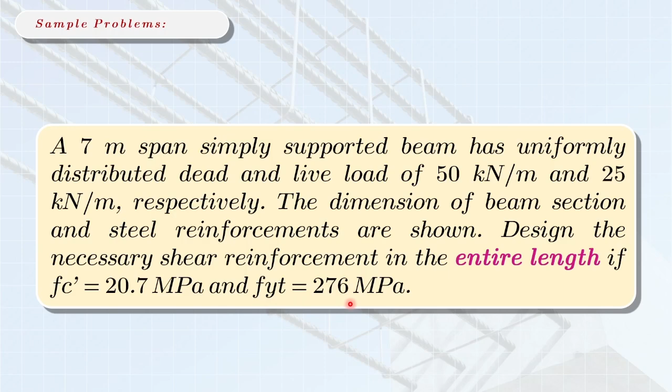Okay, so this is the figure, by the way. So this is our simple supported beam with a span of 7 meters, and our loading here is just simply a uniform distributed load. So we're given here two load cases, the service live load and the service dead load. And please take note, we're given here the f'c, which is 20.7 megapascal.

And if you notice, our subscript here or our variable here is FYT. That simply means the rebar strength of our stirrups, since we are targeting the stirrups in our topic today.

Then please take note of additional information that the diameter of our stirrups is 10 millimeters. So we're given our section. By the way, this is the section at the span of the beam. So we're given the width of the beam, which is 350 millimeter, and we're also given the effective depth, which is 500 millimeter.

And then we have here the reinforcements. So in tension, we have 3 pieces of 20 millimeter diameter. And also for compression, we also have 3 pieces of 20 millimeter diameter.

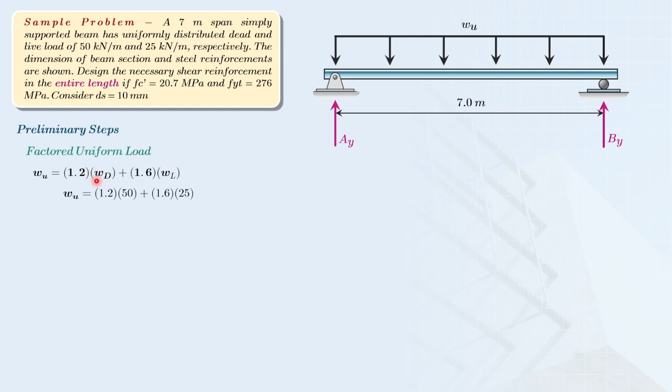Since we're given the service dead load and service live load, which is 50 and 25 kilonewton per meter respectively, to get our ultimate uniform load, of course we'll use the typical 1.2 dead load plus 1.6 live load. So by simply substituting this value, we get our ultimate uniform load, which is now 100 kilonewton per meter.

So that means our uniform load here is 100 kilonewton per meter. And also, since we'll be getting the design shear strength, we need to use ultimate loads here.

So the next thing we'll do, since we're on shear, and as I said earlier, we need to get shear values or construct a shear diagram, we need the reactions at the supports. So what I can do here is simply use our equilibrium equations.

So I will take the summation of moment at point B, so that when I do the moment, I can get the value of the reaction at A, which is just the vertical reactions that we're getting here. The value for the reaction at A is now equal to 350 kilonewton.

So similarly, I'll also get the reaction at support B, which is the roller. So I'll use the summation of forces, or the vertical forces, positive when upward, then this is equal to 0. We simply substitute everything. So the vertical reaction we get at support B is also equal to 350 kilonewtons.

Now let's get the shear values, because we need this as a guide for our shear diagram later on. And please take note, when we get shear values, only vertical forces should be our consideration here. So let's start at our point A.

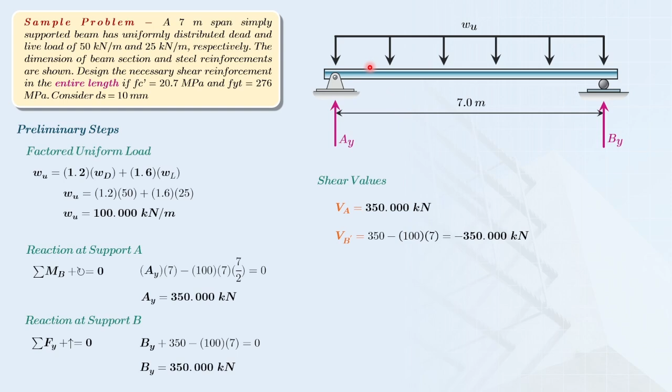Okay, now our next point here is point B. But please take note, when we're at point B or at subsequent points on our beam, we have two values there. First, before applying the vertical load. Second, after applying the vertical load. So that means the shear at point B, before applying the vertical load, means I'll take my 350 kilonewton and minus the total shear in this span.

Which is by simply taking the area between the uniform load and the length of the beam. So that's 350 minus 100 multiplied by 7, which is equal to negative 350 kilonewton. And then after that, we incorporate the vertical reaction at support B, which is positive, so it should be plus, and it should be equal to 0 kilonewton.

So ideally, that should go to 0 in our shear diagram. So this is the respective shear diagram once we plot it. This means we will have a point of zero shear, located at the midspan of our simply supported beam, which is 3.5 meters from support A.

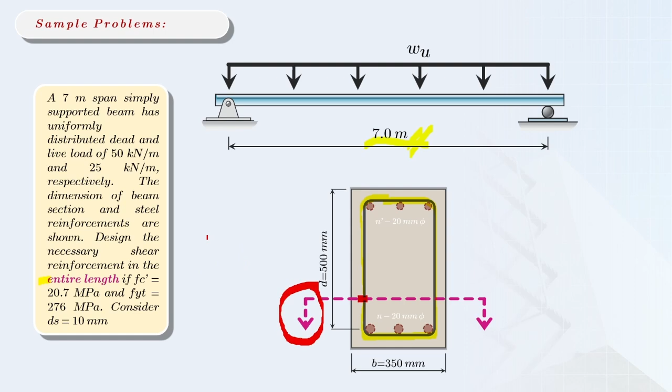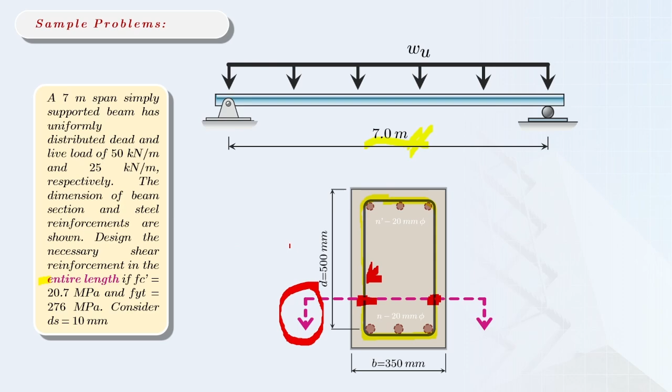So one, two - meaning two stirrups or two areas of shear reinforcement are considered here. Please take note, it's two, because in our exhibit earlier, two were crossed by our section line. And then of course, the area of the circle, specifically for our stirrups. Let's substitute the values so that the area of shear reinforcement we get is now equal to 157.080 square millimeters. This value we will substitute later on.

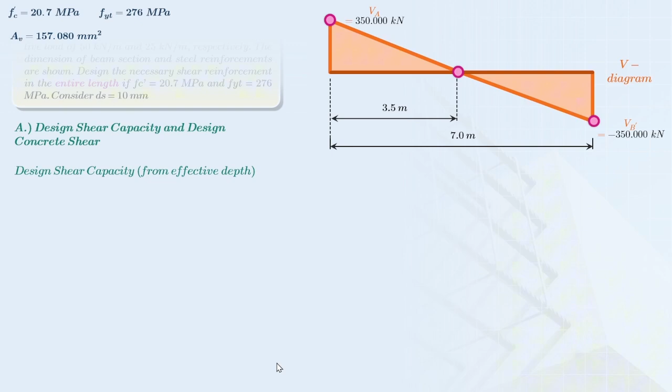Now let's proceed to our first step. Our first step here is we need to find the design shear capacity and the design concrete shear. To know the design shear capacity, please take note it comes from the effective depth. That's why, to get the value of V sub U, what we need to do here is incorporate the similar triangle.

I'll use a similar triangle here. Please take note, we find V sub U at the effective depth. But since we're using similar triangles, you can't use the effective depth as your base to represent your V sub U - you use the excess instead.

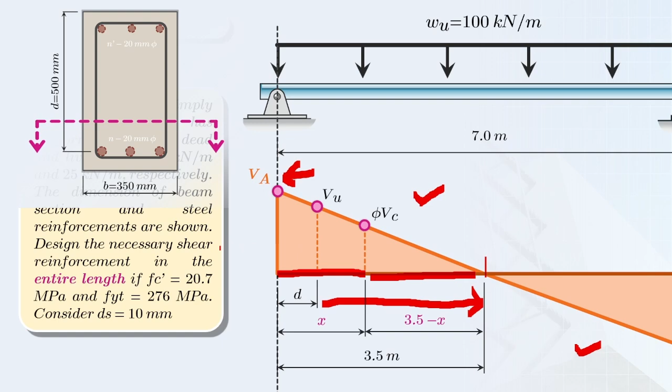Ito naman yung gagamitin mo as your base to represent your V sub U, which is by simply subtracting yung kalahati ng length sa effective depth. And then yung magiging reference triangle natin, which is this one, the shear at point A, and then yung kalahati ng span natin.

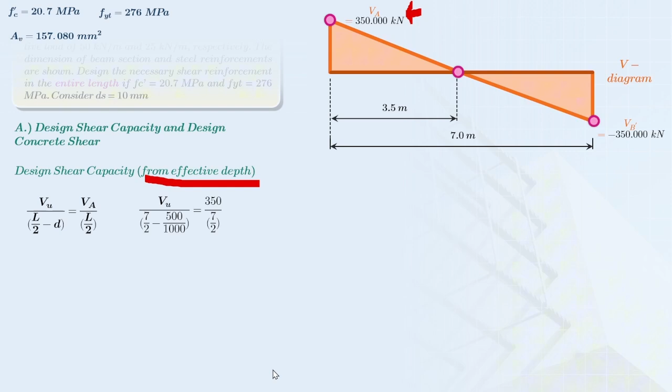So, substitute lang natin. Please take note, naka-millimeters tayo sa effective depth, that's why dinivide ko siya sa 1,000 para maging meters. So that yung magiging value ng ating V sub U or design shear capacity, this is now equal to 300 kilonewtons. Exactly, 300 kilonewtons. Then, hanapin naman natin dito yung design concrete shear, which is the value of V sub C.

Please take note, doon sa code provision natin, ang nakalagay ay 0.17. Pero most of the time, sa ating calculation, ang gagamitin ko dito ay naka-fraction form. That's why yung fraction form ng 0.17 is 1 over 6. So, I will use this formula: V sub C is equal to 1/6 lambda square root of F prime C, width of the beam, and then effective depth.

Let's substitute all of the values here. Please take note na ang value ng lambda ko or the modification factor, kapag hindi binanggit sa problem, best to assume that this value is always 1. Tapos, ang makukuha nyo kasi dito, kung ito lang yung itatype ninyo ay in terms of Newton, so para maging kilonewton, i-divide nyo lang po siya sa 1,000. So that yung magiging value ng ating design concrete shear, or the V sub C, this is equal to 132.7 kilonewton.

Kaya lang kasi kailangan kasi class naka-design strength tayo. Kasi i-compare natin siya with our V sub U, palagi nyo tatandaan na yung strength reduction factor natin is always 0.75, multiplying with our V sub C.

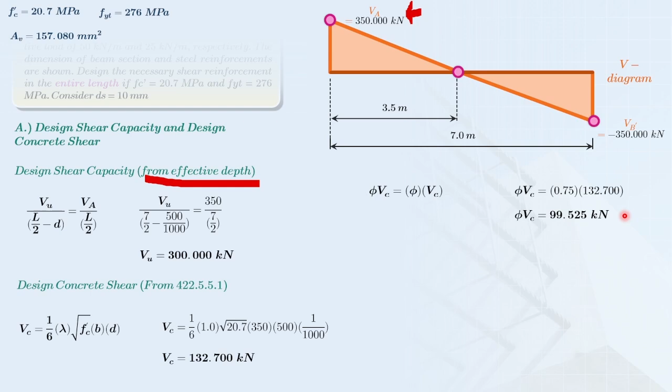The value here is now equal to 99.525 kilonewton. Ngayon, ito yung mas simple na decision making para malaman natin kung magre-require pa ba tayo ng spacing ng shear or hindi na. So ito yung magiging decision making natin.

Kapag yung V sub U ay mas mataas sa V sub C, ibig sabihin, magde-design ka ng shear reinforcement. Pero kapag mas mababa yung ating V sub C sa kalahati, kaya siya naka 0.5 kalahati, sa ating V sub U, ibig sabihin hindi mo na kailangan ng spacing ng stirrups. So, isubstitute lang natin yung mga values natin. Lumalabas na yung ating V sub U, which is 300 kilonewton, ay mas mataas siya sa ating V sub C. Ibig sabihin lang nito, kailangan natin mag-consider dito sa design ng ating shear reinforcement, kailangan mong mag-consider ng spacing for the stirrups.

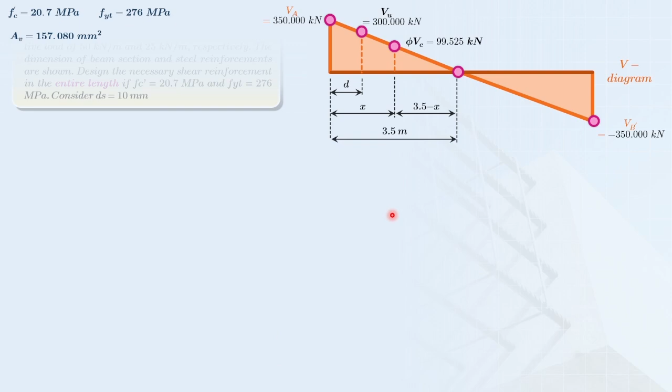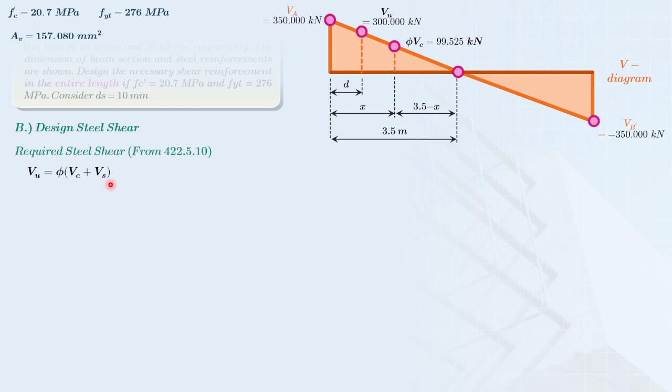Ibig sabihin lang nun, dalawang klaseng stirrups or dalawang klaseng spacing yung i-consider natin, which is later on gagawin natin yun. So, but first, i-design muna natin o hanapin muna natin yung design steel shear, which is under this code provision from section 422.5.10, para makuha natin yung design steel shear or the shear of the stirrups, what you need to do here is you will use this formula.

Then try nang natin i-substitute. So yung value ng ating V sub S, this is now equal to 267.3 kilonewton.

Then, magkakaroon ulit tayo ng point of comparison, which is by comparing sa ating maximum steel shear, using this formula. So, given yung ating mga values, substitute lang natin. Also, naka-newtons to, that's why you need to divide it by 1,000. Ang makukuha natin dito for the value of V sub S max or the maximum steel shear, this is now equal to 530.801 kilonewton. So, we will proceed sa another decision making.

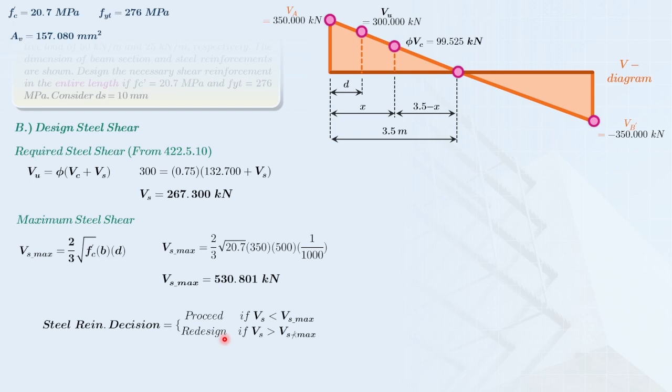Kapag mas mababa yung actual V sub S kaysa sa V sub max, or mas mababa siya sa V sub max, ibig sabihin lang yan, you may proceed sa ating pagde-design. Pero kapag mas mataas yung actual kaysa sa maximum, ibig sabihin lang po nun, redesign ka. So, paano tayo magre-redesign? Probably, pwede mong lakihan yung dimension ng section mo. Pero, compare muna natin yung dalawa.

Ibig sabihin lang nito, para sa ating decision making, lumalabas na mas mababa yung ating actual steel shear kaysa sa maximum steel shear. Ibig sabihin lang po nun, proceed ka pa rin sa design, magre-require ka pa rin ng spacing para sa stirrups natin. Ngayon, hanapin na natin yung spacing.

Yung spacing ng stirrups natin within V sub C. Ibig sabihin lang po nun, kailangan mong hanapin kung ano yung spacing dito sa region na ito, kung nasaan yung distance ng ating X, which is kailangan muna nating hanapin yung kanyang location. Ngayon, paano mo malalaman yung kanyang location? Napakasimple. Ratio and proportion ka pa rin dito, or just basically, similar triangle.

Ibig sabihin lang nito, yung height natin na V sub C over sa base niya, which is this one. Tapos, height natin dito, which is the V sub A, and then yung kanyang base, which is this one also.

So we will utilize the ratio and proportion or the similar triangle. Substitute lang natin yung mga values. That's why yung lalabas na value ng X or yung distance, yung value ng ating phi VC coming from the support, this is now equal to 2.505 meters.

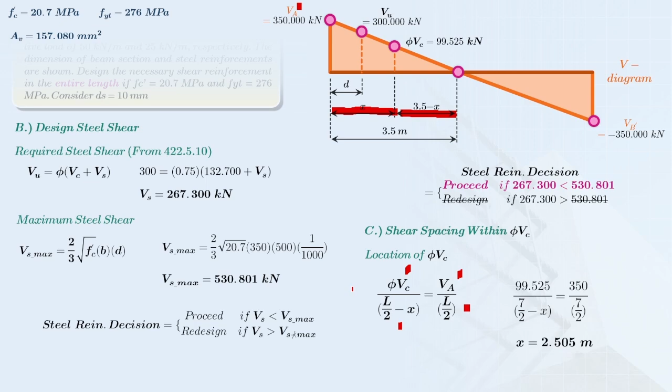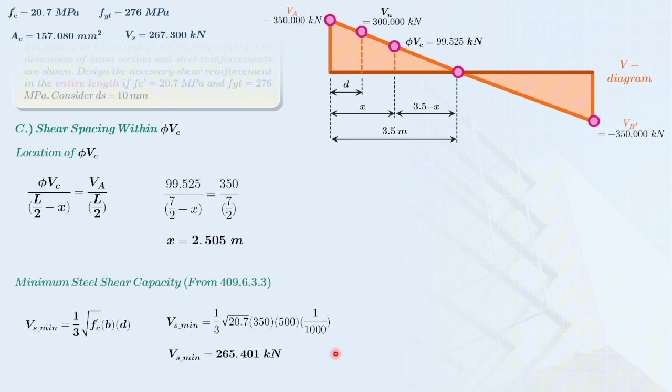Okay, so kunin muna natin dito yung tinatawag na minimum steel shear capacity, which is coming from section 409.6.3.3, or should I say yung kalahati ng ating VS max. So by simply substitute yung mga given natin, ang makukuha natin ditong value is 265.401 kilonewton. So ano nang ibig sabihin niyan?

Ang ibig sabihin lang po niyan, ikukumpara mo dito yung ating value ng ating VS sa minimum value. Lumalabas na mas mataas yung ating value.

Alright, so by comparing yung ating actual VS or the design shear strength sa ating steel sa ating minimum value niya, lumalabas dito na mas mataas yung ating actual sa minimum value. So anong ibig sabihin lang yan? Using this table, ibig sabihin lang yan, ang magiging condition mo ngayon dito, mamimili ka na lang sa dalawa dito.

Sa D over 4 or sa ating 300 millimeter. Substitute lang natin yung ating effective depth, then divide lang natin sa 4. Ang lalabas dito is 125 millimeter. And then yung second one naman is yung 300 millimeter.

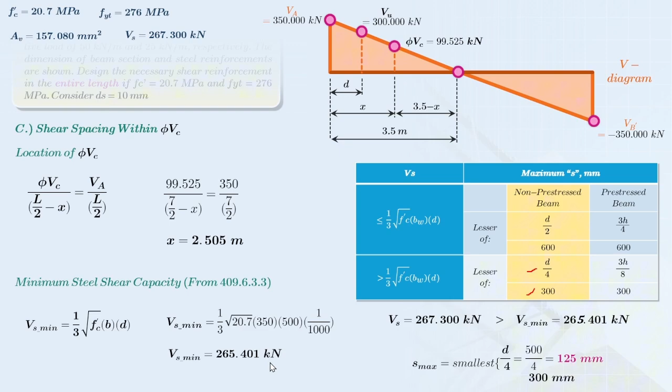Pero if we are using this tabulation, kailangan lang natin dito mamili kung sino yung smallest value. And by comparing these two, ang smallest value dito ay yung D over 4, or yung in actual value, this is equal to 125 millimeter. Ngayon, nakuha na natin dito yung maximum spacing natin.

So para malaman natin dito kung ano nga ba yung magiging actual spacing natin dito sa value ng ating X, kailangan din natin kunin yung another spacing using this formula. Kukompare lang natin yung actual sa maximum value. Let's substitute lang natin yung mga values na nakuha natin.

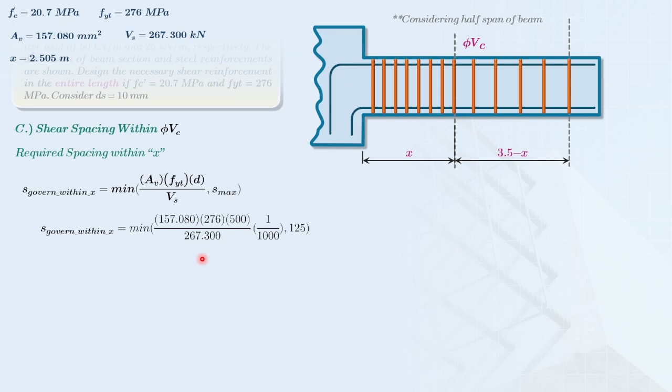Dito sa first condition natin, ang actual value niya for the spacing is 81.096. But in comparing with our 125 mm, kailangan kasi smallest value or mas masinsin yung kukunin nating value dito for the spacing within sa X.

So of course, ang mag-govern dito is the 81.096 mm. Kaso kasi class, kapag tayo ay consider ng spacing, please take note na dapat naka-round down tayo dito. Round down palagi. So ang pipiliin natin dito is 80 mm.

This is, by the way, para maging conventional lang yung spacing natin dito, I will consider here as round down to the nearest 10, palagi po yan. Sa ibang practice kasi class, ang ginagawa is nira-round down ng by 5. So ibig sabihin lang po niyan, yung spacing between stirrups dito sa within X natin is 80 millimeters.

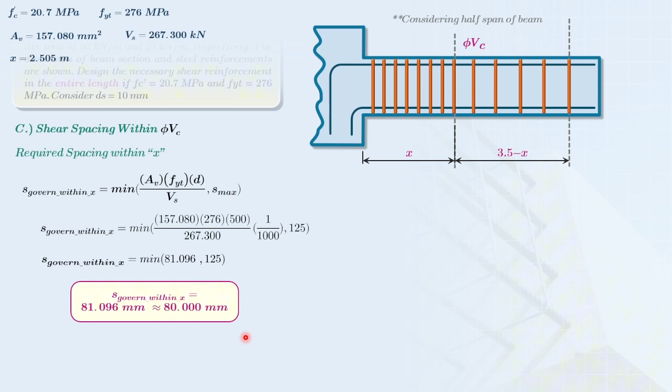So kunin naman natin dito yung stirrups. Ilang stirrups yung magkakasya po dyan? Which is using this formula.

By the way, ang gagawin ko dito, yung X na nakuha natin, which is the 2.505 meters, babawasan ko po yan ng 50 millimeters. Palagi po yan sa practice ng ating stirrups.

Okay, so i-divide lang natin yung magiging spacing, magiging length dito sa ating X sa governing spacing natin dito within sa X or within sa φVc. Ibig sabihin lang nito, by simply substitute, ang makukuha nating number of stirrups is 30.684 pieces, or i-round up natin siya. Since number ng pieces yung kinukuha natin, we will use 31 pieces.

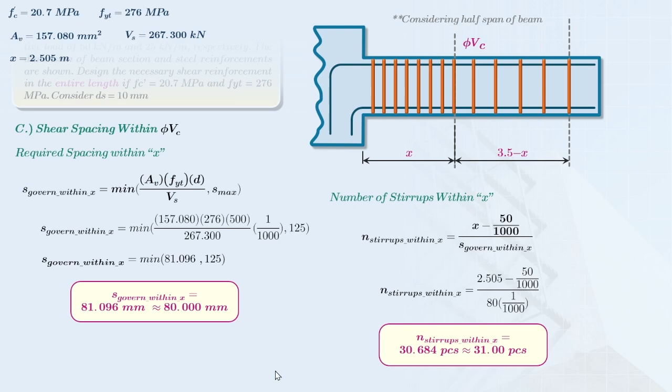So ibig sabihin lang nun, ang spacing dito within this region is 31 pieces of stirrups and then ang spacing niya dapat ay 80 millimeters. Yan po yun. Ngayon, kunin naman natin dito yung spacing naman dito sa portion na ito o dito sa region na ito.

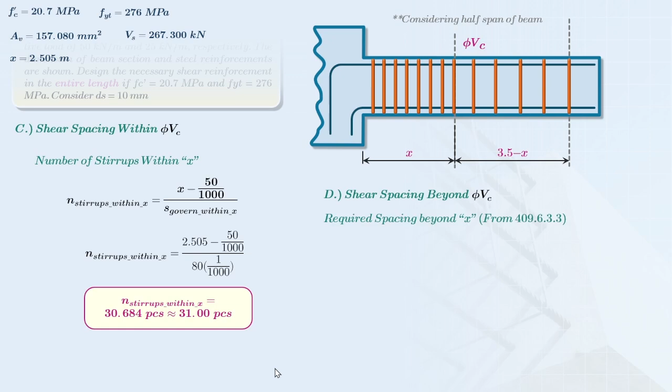Which is you will use this provision, which is the section 409.6.3.3, or by just simply using this formula. Class, direct substitute nyo lang to. Ang makukuha nating spacing dito in terms of millimeter is 353.910 millimeter.

Or i-round down lang natin by 5, so we will use here 350 millimeter. Ngayon, bakit kalahati yung pinapakita ko ditong spacing dito, o bakit kalahati lang ng span ng beam yung kinoconsider natin dito?

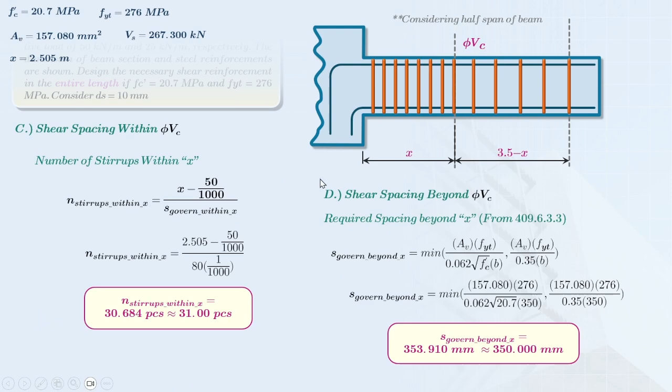Remember dun sa ating shear diagram, which is this one, eto class. Yung ating shear diagram, in terms of their form, ay very similar. Okay, disregard of their values.

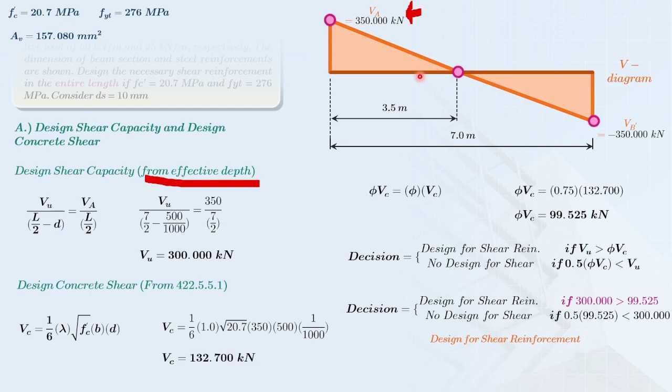Ibig sabihin, kung ano po yung magiging spacing ko dito sa left portion, yan na rin po yung magiging spacing ko sa right portion. Or should I say, in this most simplified diagram natin, ito po yung magiging itsura ng ating shear spacing natin or the placement of our stirrups.

So please take note, sa within φVc or sa within sa X, kapag mas malapit ka sa support, mas masinsin yung ating spacing. Pero kapag beyond φVc ka na, which is on this region, mas malawak na yung magiging spacing niya compare sa malapit sa support. And this is our sample problem number 1. Thank you.